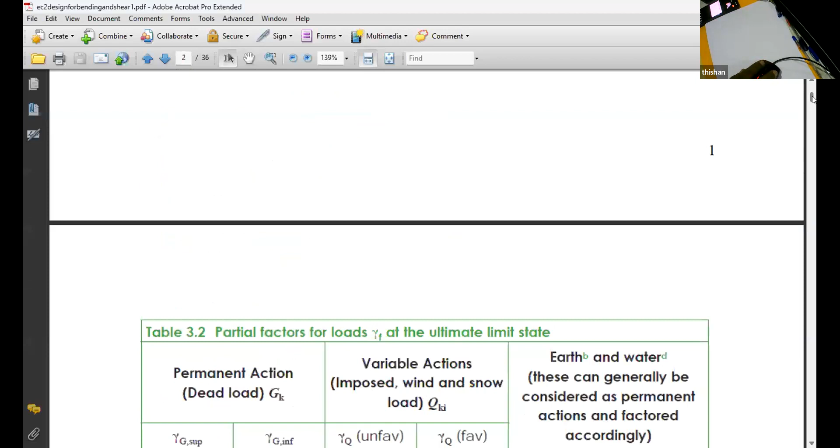Right, good. Okay, first we'll share the screen, see this note. Right. So if you look at... now you can see there are many tables and so on.

So after the Second World War, the world learned that these wars are not going to help anybody. So, Civil Engineering Sectional Committee, lecture number 1, on 29th November 2023. I'm numbering all the pages so that we can share the notes later.

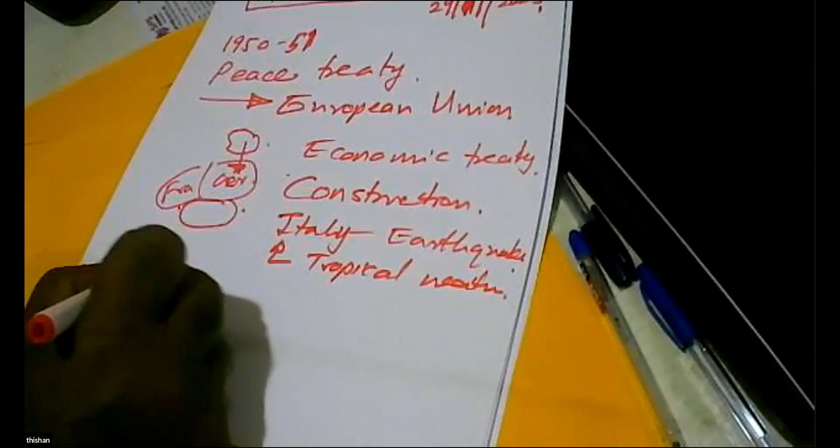But if you look at Europe, you get Italy. What is Italy? A country subjected to earthquakes, and it has more tropical weather. Whereas Germany has no earthquakes, but it's cold weather. So they thought, if you are going to have one standard used by everybody, we can't have one standard across all the different climatic conditions.

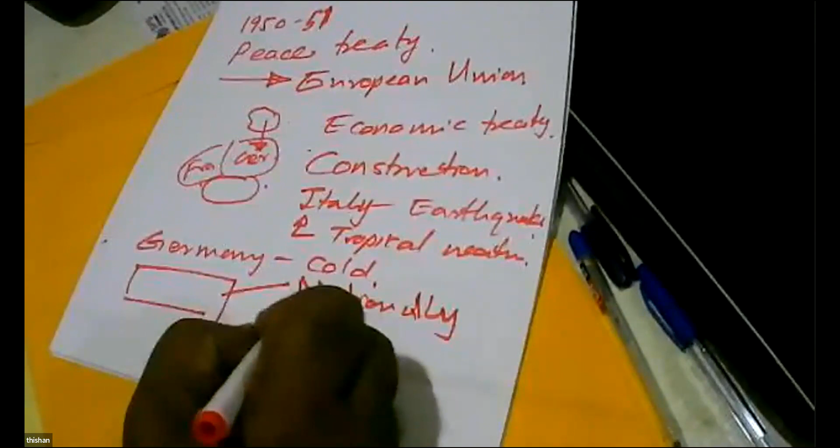So they thought, let's have one code, and we'll allow nationally determined parameters. That means they can differ from the generally proposed parameter in the Eurocode. So with that, we got something called national annexures. And you will find that when a code is developed, there can be many parameters.

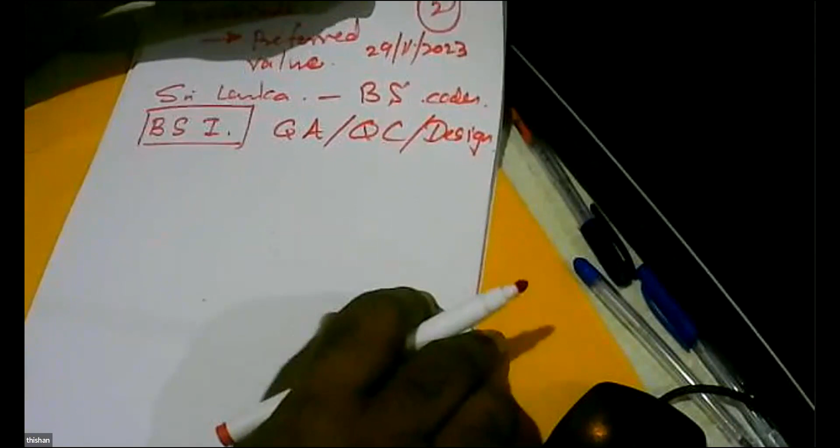But have you ever thought why BS codes are so applicable to Sri Lanka? If you look at England, it has 3 to 4 months of summer. What is the temperature range? The temperature can change between 20 and 30 degrees. In Sri Lanka, throughout the year, the temperature can vary between 20 and 34 degrees. So you can see, if you have a certain standard applicable to England, which is a temperate country, not a cold climatic country, we can actually use those standards pretty well in Sri Lanka as well.

So if you look at Eurocodes, they have 36 codes altogether. So you can see, if you want to be a very good designer, you should know all these 36 codes.

When these Eurocodes came into action after 2010, because all the British code standards ceased operation in 2010, a very good initiative was taken by Sri Lanka Standards Institute, and Engineer Mangala Silva also participated as the representative of IESL. They have already completed a few national annexures. They looked at the British national annexures very carefully and made only minor changes, keeping most of it unchanged because it's actually applicable to Sri Lanka. So if you don't have a national annexure, you don't have to worry. We can simply use the national annexure of England, United Kingdom, because those are actually applicable to our country to a great extent. So we don't have to panic. We can simply change over to Eurocodes without worrying very much, because UK national annexures are already available. So that's how it goes.

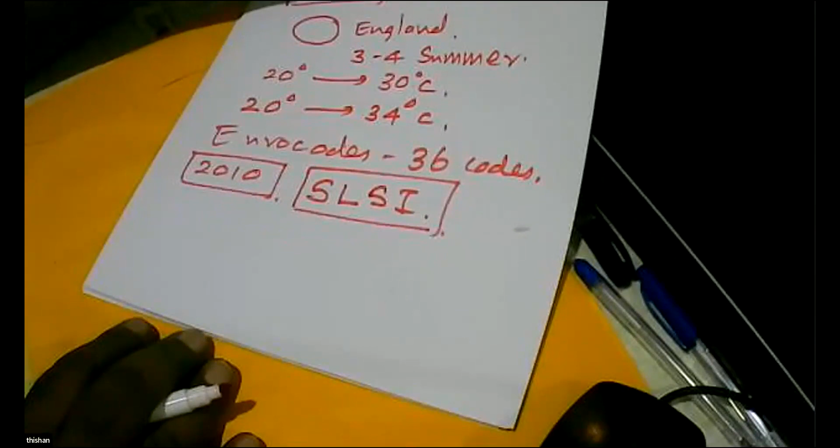So if you look at loading, the approach for loading is one of the key things that we start for a design. To start a design, we must know loading. Not only loading, we must know how to generate critical conditions, critical combinations.

If I take an example from the British Code, a simple example that most of you are very familiar with, Civil Engineer Section Committee, 29th, 11th, 2023.

So, Mangala? Yes, can you hear me sir? Yes, I can hear you. Today we have participation exceeding 200. Is that right? Yes, 211. 211. Yes, good, right.

So basically, if you look at a beam, let's take a simple beam. In the British Code, we say, okay, we must have GK, that is the dead load. Then we say, okay, you can have imposed load, QK.

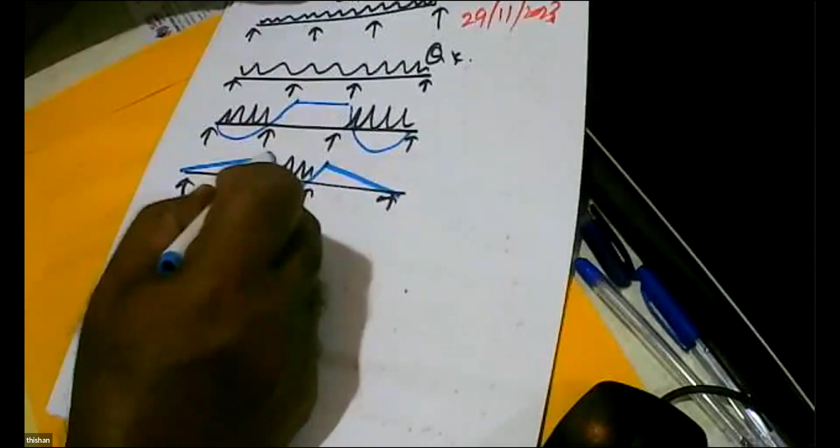We can have QK in different ways - these two have QK, or we can have QK here. What is the effect? We end up with a bending moment diagram that goes like this, or a bending moment diagram that goes like this, or one that does that. And here also we can have a bending moment diagram that does that. So we can have different diagrams.

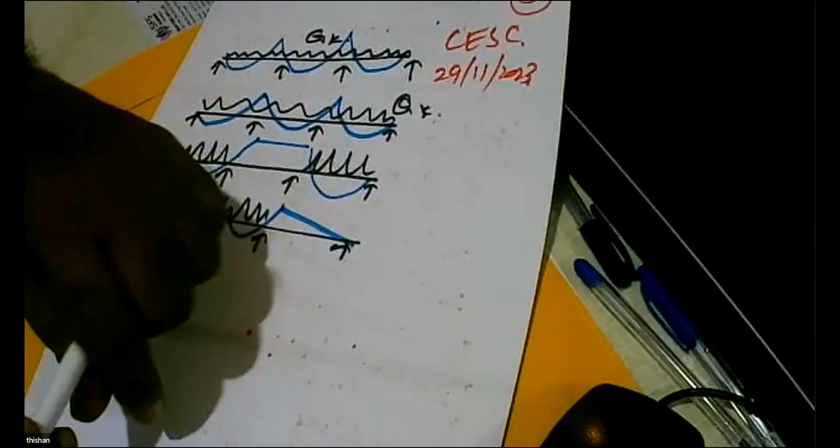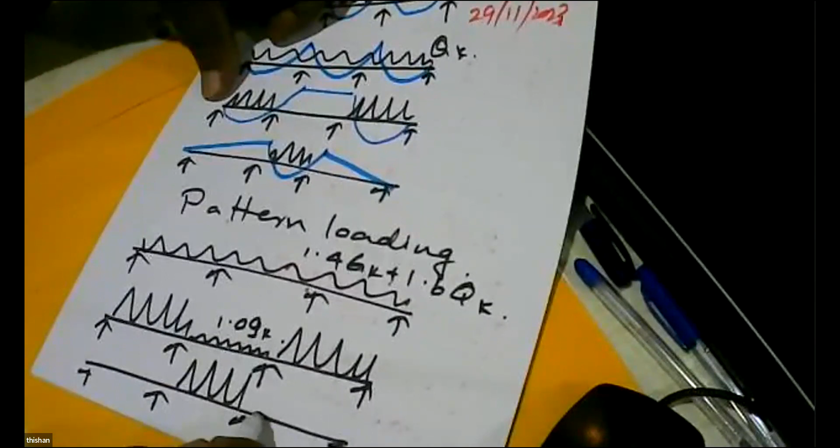So to get the most critical combination on a beam, we say let's go for pattern loading. When you are going for pattern loading, say we have 3 spans. We can have 1.4 GK plus 1.6 QK, or else two other patterns where you have 1.4 GK plus 1.6 QK and 1.0 GK, or this one 1.0 GK, 1.0 GK, and here you get 1.4 GK plus 1.6 QK.

So we can have pattern 1, pattern 2, pattern 3, and if you look at the bending moment diagrams...

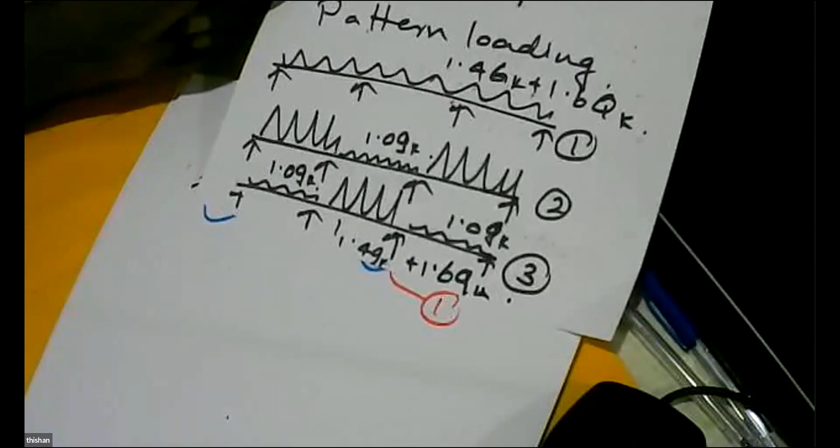So we'll have a beam having a bending moment diagram like this - that's due to pattern 1. Then due to pattern 2, which is this one - pattern 2 is this one - we can have a bending moment diagram that does this and going that way. Or else we can have a third pattern, this pattern 3, can see the pattern 3, we can have something like this.

And, giving an envelope. Once we have the envelope, we say now we have an envelope and we are going to make use of the envelope, not the diagram. We are going to make use of the envelope.

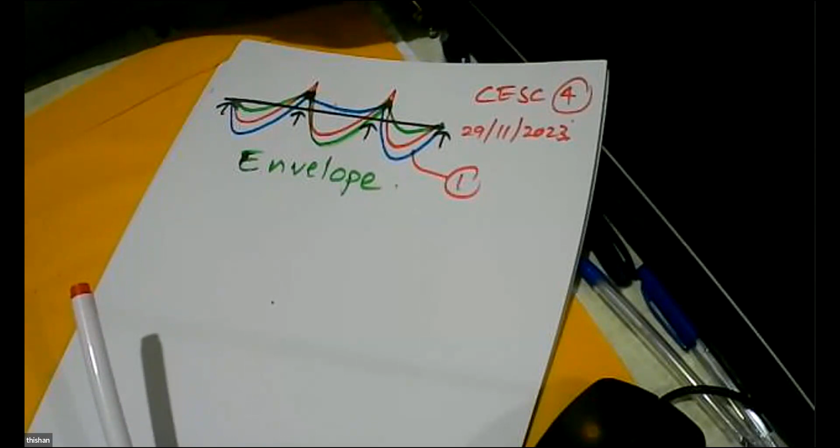Similarly, corresponding to this, for shear also we will end up with an envelope. For shear also we will get an envelope, but for the time being we will concentrate more on the flexure. So now we see, just one moment.

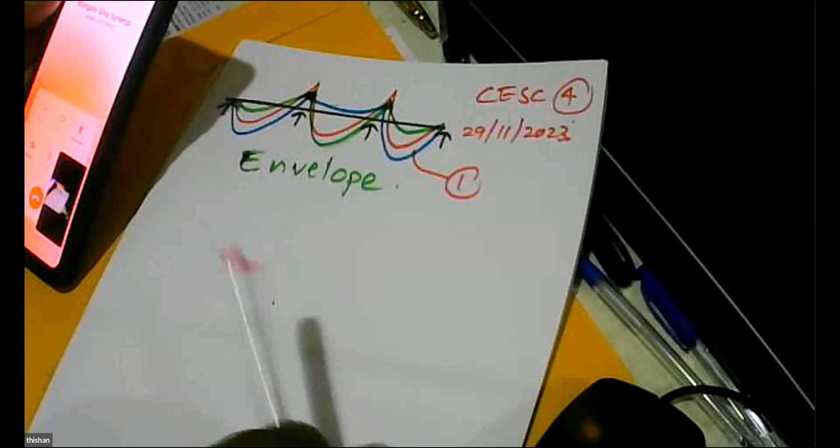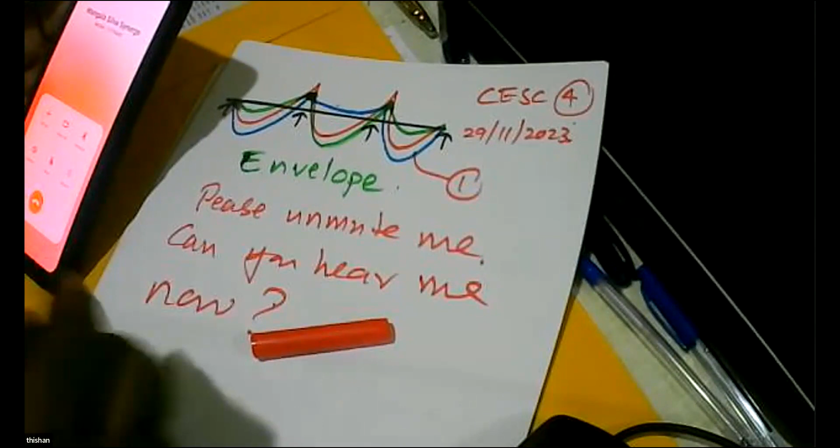Banduka, this is a small request from Professor Jaisinghe to unmute him. Engineer Banduka, yes, can you make Professor unmute for a few minutes? Oh yeah, I will do it. Can't unmute from this end. Can't you unmute from this end? No, can't. Then please tell him. Okay, Professor, Engineer Banduka said it is not possible to unmute you. No sir, we can't hear you still. I think it is muted. And I can't unmute from this end. Okay sir, now can you try sir? Yes, now it's okay. Okay fine. Right, now you can hear me clearly? Yes, we can hear you sir. Now you can hear me? Sir, we can hear you sir.

Yes sir, good. Right, okay, so we have to go for an envelope like this.

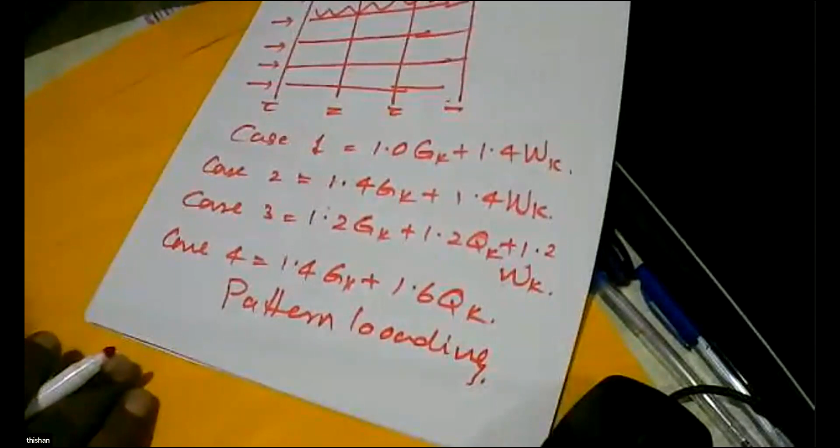So this is what the British code says. Now let's see what the Eurocode says - Eurocode is slightly different in this approach. So this is what the British code says: case 1, case 2, case 3, case 4, and for case 4 it says consider pattern loading as well where applicable. Right, so it's clear.

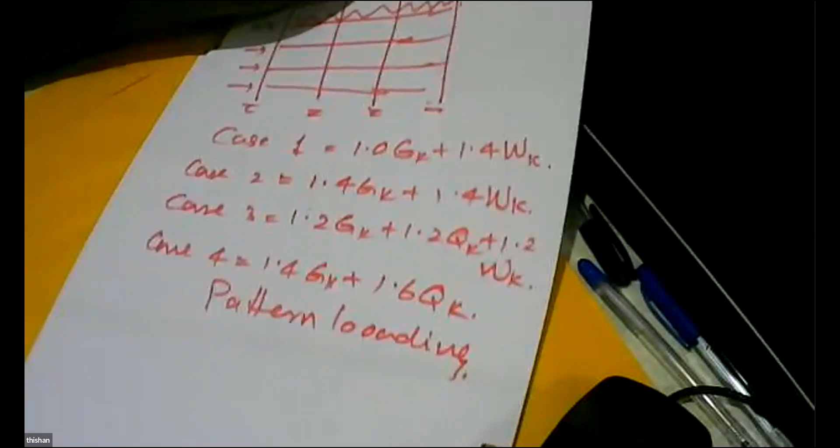But now let's look at Europe. Now I'm looking at Europe. So it talks about the dominant effect and other effects. So let's have a quick look at how it goes by sharing the screen.

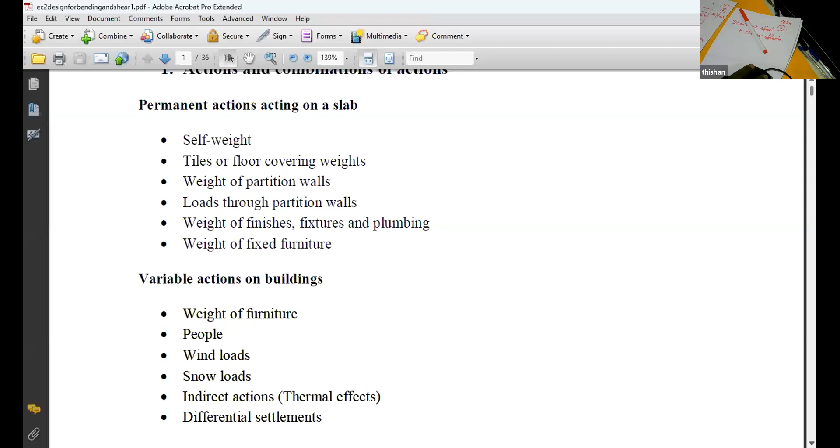If you look at the structure, we can have so many different actions and combinations of actions: due to self-weight, tiles and floor coverings, weight of partitions, loads, weight of fixtures, plumbing, weight of fixed furniture. Those are the vertical actions, the permanent actions. Variable actions include weight of furniture, people, wind loads, snow loads, indirect actions, thermal effects, differential settlement. Those are variable actions.

When you look at loads, what we do is multiply the basic loads by the appropriate partial factor gamma F to get the design loads. When more than one live load or variable action is present, the secondary live load may be reduced by application of the combination factor psi. See table 3.4.

The basic load combination for a typical building becomes: gamma G for the dead loads, gamma Q for the imposed loads, and this is the primary one. For the secondary one, you get another psi naught factor. So what it means is... we have the structure, now we are talking about all types of loading.

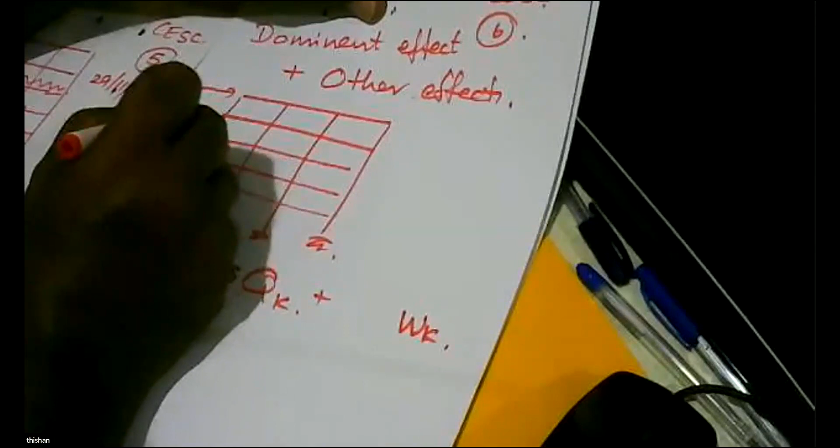What it says is, okay, you can have GK. What is the factor? 1.35, instead of 1.4 you have 1.35. Plus QK dominant, then you can have 1.5. But when these two are dominant, you can have wind load also dominant, so we have WK. For WK, the factor is 1.5, but you have to consider it multiplied by 0.5 times. So the combination will be 1.35 GK plus 1.5 QK plus 0.75 W.

Whereas in British code, we have 1.2 GK plus 1.2 QK plus 1.2 W. Now at the same time, you can say WK can come this way, QK can go that way, then you can have 1.35 GK plus 1.5 WK plus 0.7 times 1.5 QK, so you will end up with 1.35 GK plus 1.5 WK plus 1.05 QK.

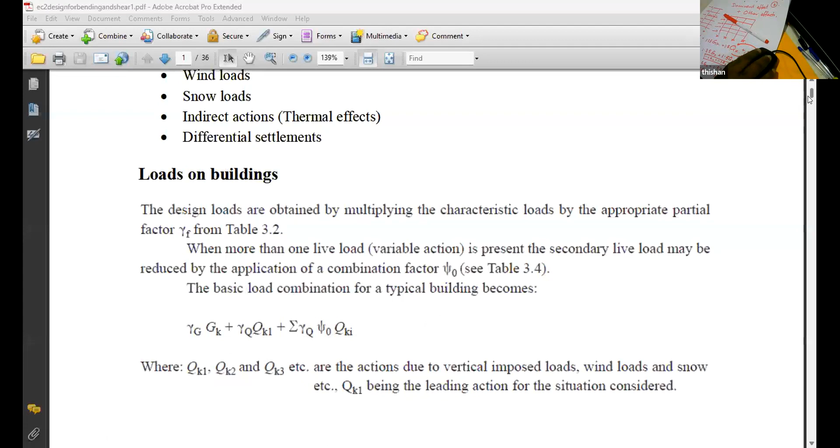Now you can see GK, QK, QK, and QKI. So you can have a number of things combined, but for each one you have a psi naught factor. Let's see what this psi naught factor is. Now you have to become a little familiar with these reduced factors of safety for dead loads and imposed loads, 1.35 and 1.5. Earth and water can generally be considered permanent actions and factored accordingly - earth and water loads should all be multiplied by 1.35 because they are permanent loads, if they are permanent loads.

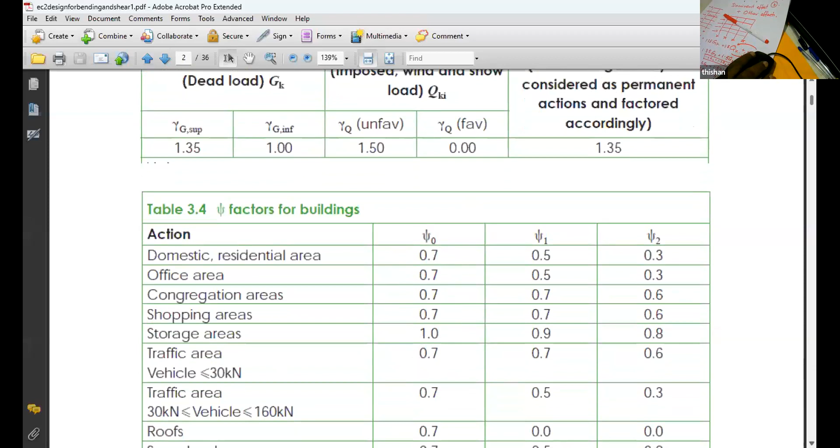Now let's look at this one. We are interested in this psi naught factor. Except for storage areas, generally the psi naught factor is 0.7. But when it comes to snow loads, wind loads, it reduces to 0.5. And when you want to get temperature effects, you have to use 0.6.

Then you look at why you are having some other factors, psi1 and psi2. When you are using Eurocode, at certain places you will find it uses psi1 and psi2 factors as well. Whenever you see psi1 and psi2 factors, you must come back to this table and have a look.

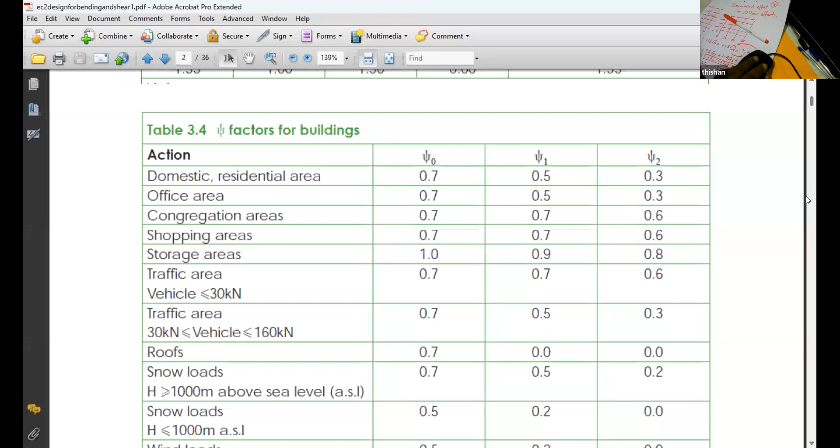Okay, so basically I will send this note. Traffic area vehicles: traffic area 30 kilonewtons, vehicle up to 160 kilonewtons, that means 3 tons to 16 tons for area vehicles, roofs, snow loads at high altitudes, and wind loads.

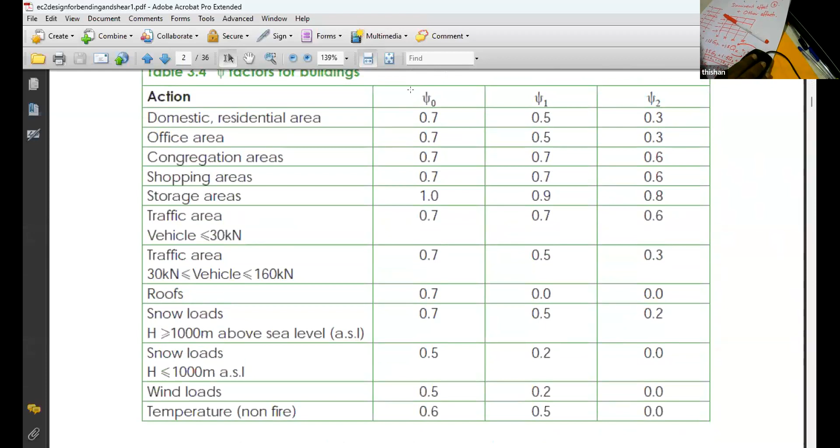There are so many factors, but let's not worry about psi1 and psi2 for the time being. Whenever we come across those in equations, we'll look at what is meant by them. But generally, we should know what is meant by psi naught to use Eurocodes.

It also says unfavorable and favorable factors should be used so as to produce the most onerous condition. Generally, permanent actions from a single load source may be multiplied by the unfavorable or favorable factor. For example, all actions originating from the self-weight of the structure may be considered as coming from one source, and there is no requirement to consider different factors on different sources, except when overall equilibrium is being checked.

So let's have a quick look at what is meant by this particular situation. These are all from EC1.

Let's look at this one. In Eurocode, pattern loading is considered to find the worst case possible when checking structural adequacy. When pattern loads are considered, only the variable load is patterned. For the permanent load, either 1.0 or 1.35 can be used, whichever gives the worst effect. So generally, when checking pattern loading in British code we use 1.0 GK here,

but in Eurocode we use 1.35 times GK. In the British code, we use 1.4 GK when it is fully loaded, and 1.0 GK when only the dead load is available. But in Eurocode, we use 1.35 GK - the minimum load is also 1.35 GK, it doesn't change. That is one of the variations between British code and Eurocode.

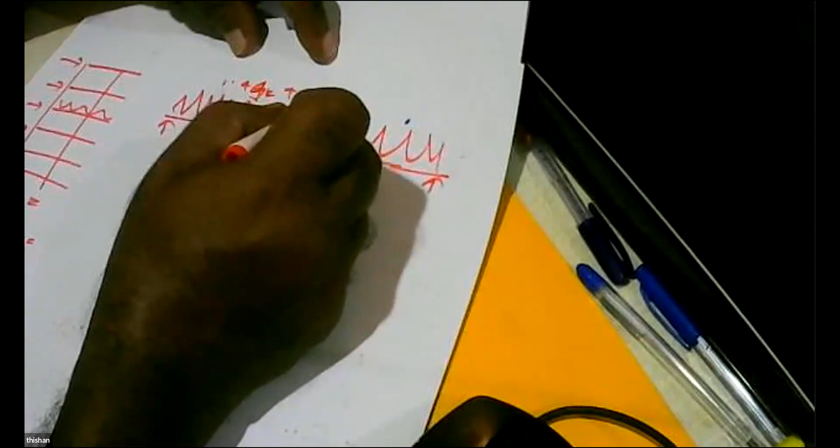So that is 1.4 GK plus 1.6 QK, but here 1.0 GK. In Eurocode, it's the same thing you are doing, but this is 1.35 GK plus 1.5 QK, and this is also 1.35, not 1.0. That's another important change you have to keep in mind when generating pattern loading.

Actually, it's very easy to generate pattern loading using a computer because of this particular condition - because we are using the same parameter for the dead load. It can be either 1.0 GK throughout, but because you are using 1.35 GK plus 1.5 QK, here also you have to use 1.35 GK. So that's how it goes - we use 1.35 GK, but not 1.0 GK as we have done in British codes.

Bandhuka, is that clear? Yes, sir, that is clear. That's clear, so that has to be kept in mind.

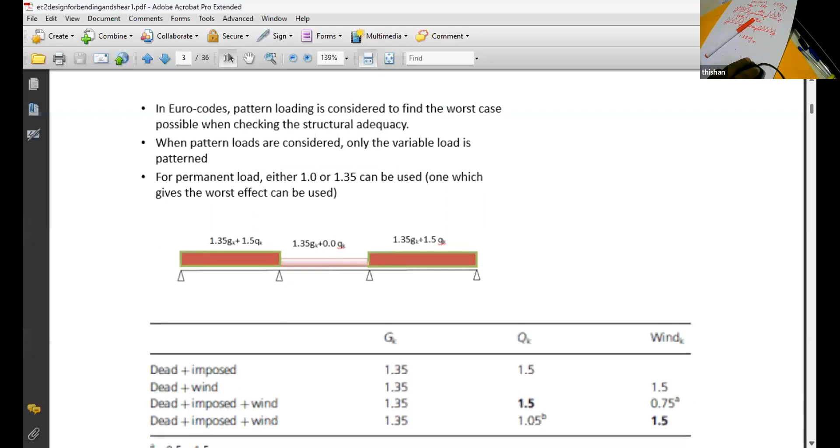the combinations: dead and imposed 1.35, 1.5. Dead and wind 1.35, 1.5. Dead, imposed and wind 1.35, 1.5. Dead and imposed, but wind should be multiplied by 0.5, so 1.5 multiplied by 0.5 is 0.75. For dead, imposed, wind, you have another combination where wind is kept full and imposed is multiplied by 0.7 - 0.7 multiplied by 1.5 is 1.05.

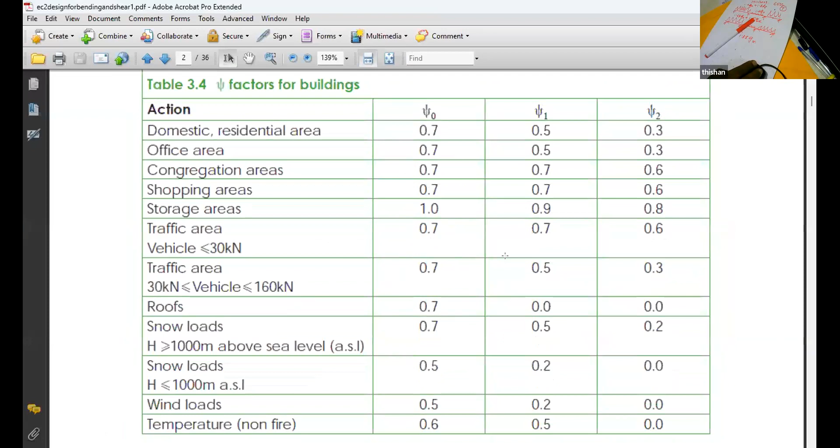Why it happens is, if you look at the previous table of psi naught factors, for wind load it's 0.5, and for domestic conditions and all the other conditions it's 0.7. So imposed loads use 0.7, wind loads use 0.5. So you end up with a table like this, and then you have to look at this condition.

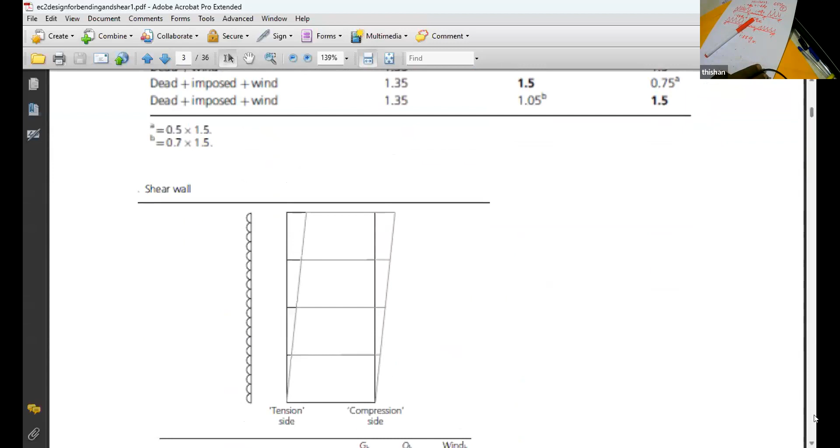Now we are looking at the stability, or the worst case scenario, for a shear wall. On this side you get tension, and to get tension the self-weight has to be minimum. In that situation, on the tension side you get 1.0 GK, and on the wind side, the wind is 1.5. We are looking at lateral stability, whether tension can occur and the shear wall can crack on this side. So to make sure that happens, we maximize the wind and minimize the weight.

So you can have a combination called 1.0 GK plus 1.5 WK. In British code, it used to be 1.0 GK plus 1.4 WK. Here you can see it's 1.5 WK. And then the British code had 1.2 GK plus 1.2 QK plus 1.2 WK. Instead of that, you get 1.35 GK plus 1.05 QK plus 1.5 times WK. In British code, we had only one dead, imposed, wind case, which is 1.2 GK plus 1.2 QK plus 1.2 WK.

Whereas in Eurocode, we have two combinations when dead, imposed, and wind are acting. Here the imposed load is the dominating case, and this is the wind load dominating case. Here you can see wind load is 1.5, and here the imposed load is 1.5. So this one is dominated by the imposed load, and this one is dominated by the wind load.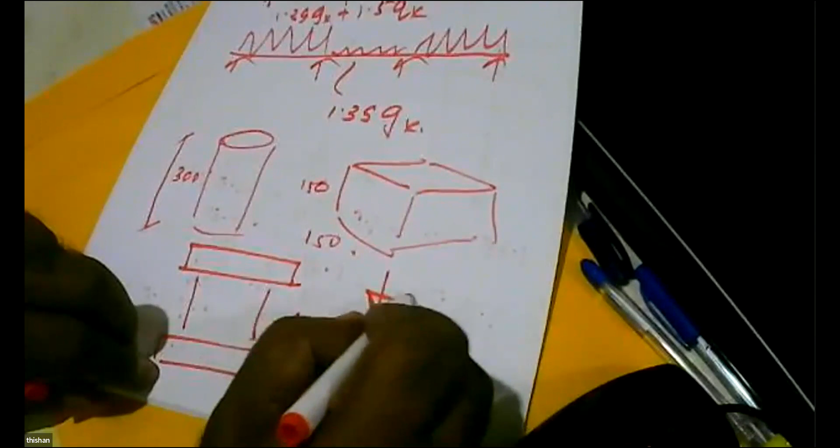Nu is the Poisson's ratio - that's the theory we have learned, I think even at advanced level, as far as I can remember. Anyway, in university you learn it. So what happens? When the cube tries to break, these places are restrained. Because of that, the cube strength is higher than the actual strength. So cylinder strength gives the actual strength, while cube strength gives a higher value. We have to always keep in mind the cylinder strength is not... rather, the actual strength is only 80% of the cube strength. Is that clear? You have to be very clear about that - cylinder strength is the actual strength, whereas cube strength gives a higher value.

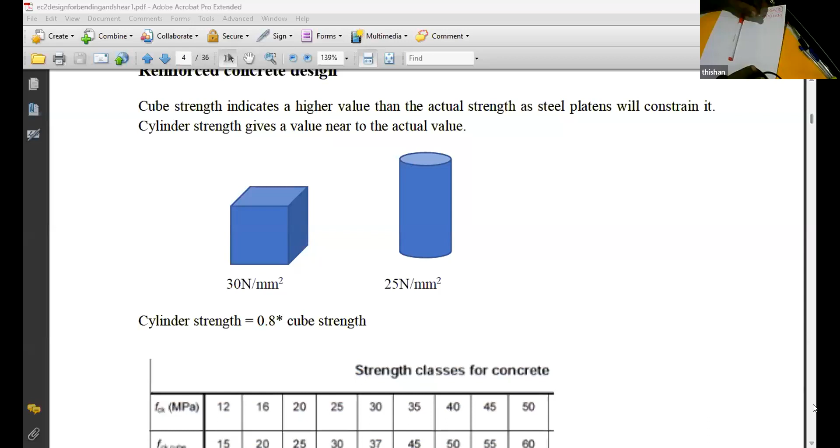Now let's look at this, let's share the note again. So here you can see the strengths. FCK means cylinder strength, FCK cube means cube strength - that's the notation used in Eurocode. So here you can see, when you have 20 megapascal cylinder strength, the cube strength is 25. When the cylinder strength is 25, it's 30 for the cube. So we say we have C25/30 concrete, C30/37 concrete, C35/45 concrete, C40/50 concrete, C45/55 concrete, or C50/60 concrete.

Now you will ask why I have not included the table beyond 60. Cube strength of 60 is a special value in Eurocode, and it actually allows you to go up to 105 cube strength. But the equations that you use are generally valid only up to 60 megapascal. If you are going to use concrete stronger than 60, you have to have different parameters for the design equations. You cannot use the normal design equations if you are using anything beyond 60 megapascal. That's why I have included only up to 60.

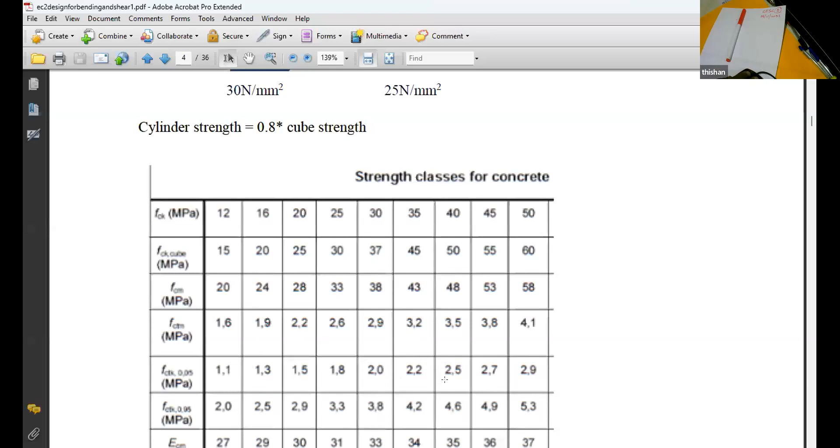There are tensile strength values used in pre-stressed concrete design. But in reinforced concrete, we consider the concrete as cracked, so we don't have to worry about tensile strengths. However, when designing pre-stressed concrete, you need to worry about those values.

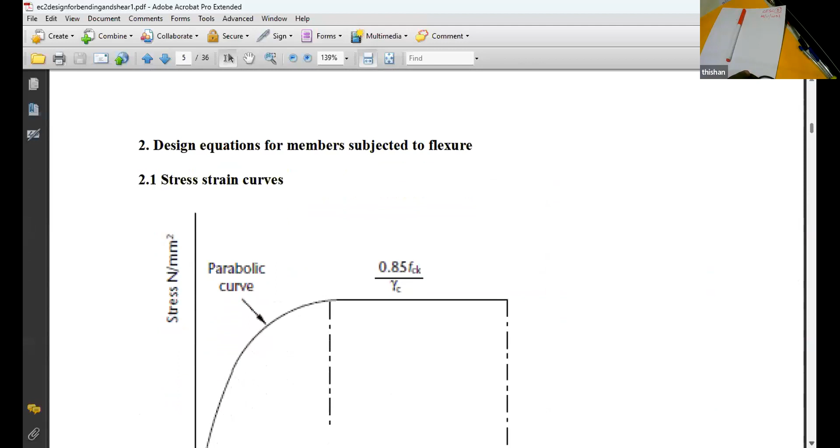If you look at the stress strain curve, the maximum strain allowed is 0.0035. By looking at the stress strain curve, we can get more information. This is the stress strain curve for concrete.

FCK is the cylinder strength, and we have to consider 85% of that. The reason is we test the concrete in compression, then use that value in flexure. So the flexural strength of concrete in compression is considered as 0.85 times the cylinder strength.

It starts to become a plastic material from a strain of 0.002, and it cannot take a strain more than 0.0035. This is a very familiar figure - even in BS code, we consider that concrete cannot take a strain of more than 0.0035. So this is the stress strain curve for concrete.

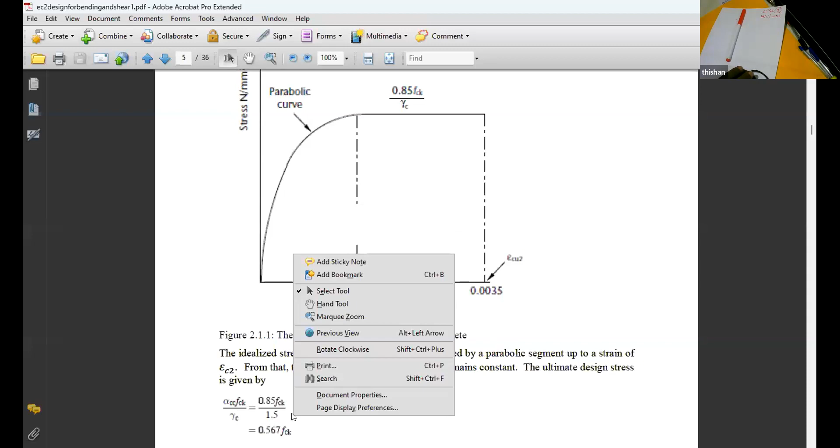It is 1.5 because we are supposed to cure concrete once we place it, but many people do not pay enough attention to curing. So we can't use 0.85 FCK because we might be overestimating the actual strength of concrete in the structure. To allow for that, we use a high factor of safety, not because we are making bad concrete, but because we don't cure adequately.

We do not cure it adequately. Because we are not curing it adequately, there can be variations in the strength. It's not only because we use different ingredients to make concrete, but curing also comes into play. So curing is very important, and we must cure concrete properly. This also allows for the long-term effect, the difference between cylinder crushing strength of concrete and bending strength. The value 1.5 is used as the partial safety factor for concrete strength, gamma C.

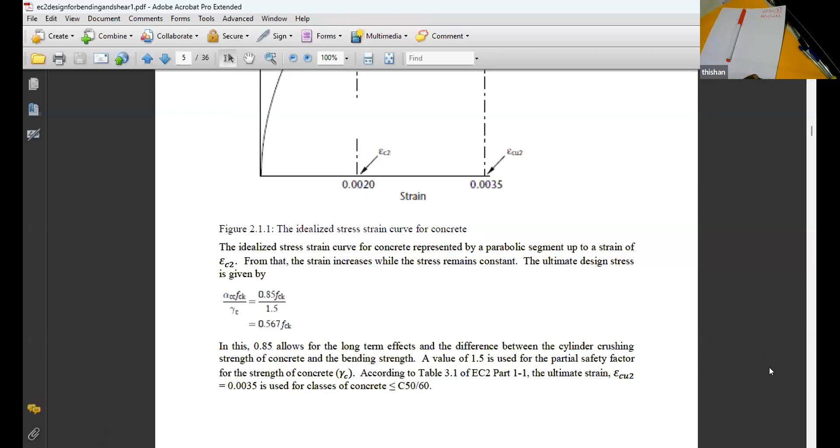Up to C50-60 concrete, we can use 0.0035, but beyond that it will be less. Now let's look at steel.

Eurocode allows steels from 400 megapascal to 600 megapascal tensile yield stress. Eurocode specifically says any steel used should be 400 to 600. So that means we can make use of old tor steel, which had a strength of 460.

But these days we use QST bars - quench and self-tempered bars. What we do is get the steel bar manufactured red hot, then pour water onto it, making a very hard surface. Then we allow it to cool down gradually. When cooling down gradually, the toughness might reduce to a certain extent, but it remains very hard on the surface while the interior remains very soft. So when you bend the bar, the chances of it breaking are very remote.

Also, you can get a higher strength. By adjusting this heating and cooling process, you can get 550 steel or even 600 steel. This might be a good idea for Sri Lanka because steel is very expensive there, so it might be good to go for 600 strength. But at the moment, we only have 500 strength.

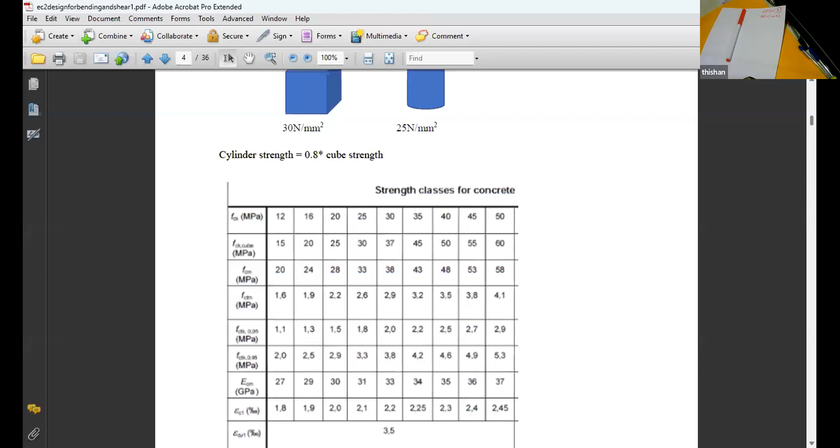That's why in all the tall buildings that are coming up, like the 1 kilometer tall Kingdom Tower in Saudi Arabia, Burj Khalifa, all have used concrete, because concrete is a wonderful material to control lateral deformation, since as the strength increases, the elastic modulus increases. Whereas in steel, even when you consider pre-stressing steel, which is high strength steel, the elastic modulus is 200. So those are the important things you can learn about steel and concrete.

And then comes how to make concrete durable. If you look at the history, the Roman emperors who knew about concrete over 2000 years ago said, we have invented a material that is going to last forever, because they had only concrete, they did not have steel. But today, when you have only concrete, the best shape is arch shape.

But today we don't use the arch shape a lot, we use beams, columns, slabs a lot. These members are subjected to flexure, whereas arch shape is generally subjected to compression. Because these shapes are subjected to flexure or bending, we need reinforcement. The moment you insert reinforcement, concrete does not become a material that is going to last forever. Why? So that's what we are going to learn now.

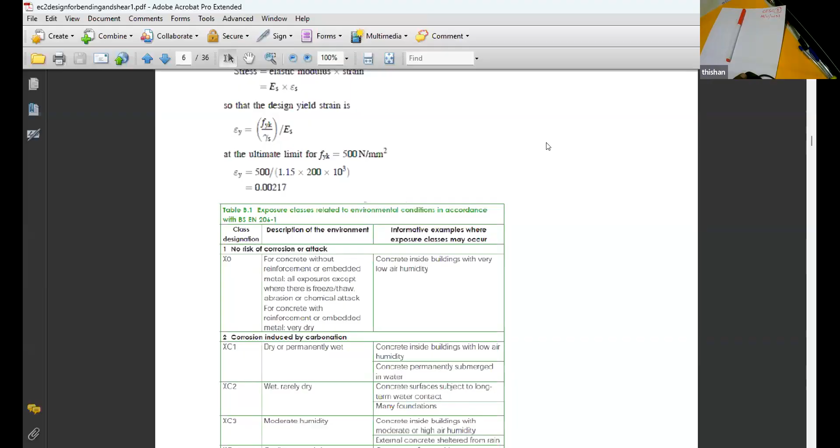I'm going to stop sharing. Just give me 1 minute before I explain this. So now I'm going to explain why durability is so important. And what is the time now? Time is 8 o'clock, so I have enough time to explain this durability aspect. Just give me a little.

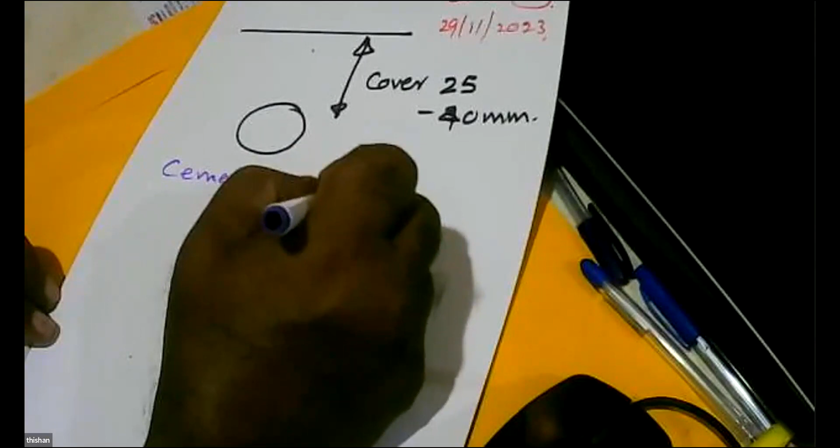Cement is some material that we only add water plus to give us a gel. But the gel is very strong. So what do you get in cement?

Tricalcium silicate. What is the importance? It's active only for a short period, 1 to 14 days. We get dicalcium silicate, it is a very slow reaction. The reaction actually starts after about 2 weeks, but it can continue.

Then we get tricalcium aluminates. Very rapid reaction, from 1 hour to 24 hours. But the problem is we can't have too much tricalcium aluminate, because it can lead to destruction of concrete after a while. So this has to be less than 10%. This can be anything, but generally it's about 65 to 70%. And in the modern concretes, this is only 5 to 10%.

Modern cement. And then you can get tetracalcium aluminoferrite, and that is an impurity that you cannot prevent when you manufacture cement.

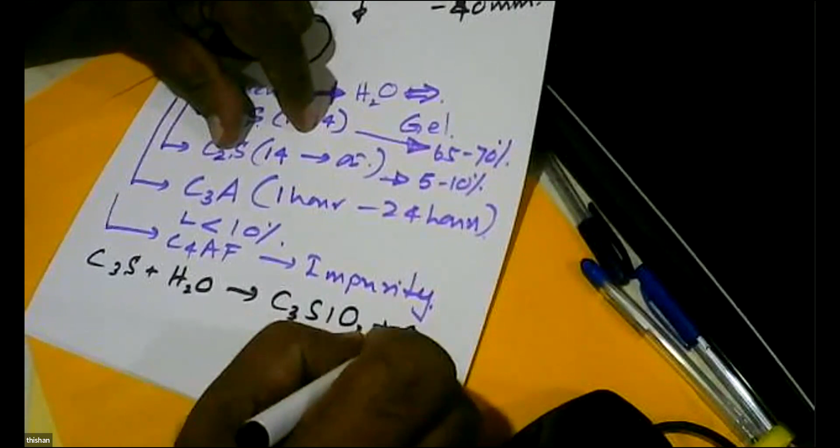So what is the reaction? Tricalcium silicate reacts, and dicalcium silicate also gives the same reaction but at a very low rate. You get tricalcium silicate gel plus calcium hydroxide. This calcium hydroxide is a very important ingredient.

When we use concrete, what is the minimum water cement ratio needed? 0.2. What are we using? We use 0.5. So what happens to all this extra water? It evaporates. Then what do you get? Porous concrete. So then what happens when you continue to cure?

We continue to generate calcium hydroxide, and all that calcium hydroxide starts filling up these voids. So it's very important that we cure concrete, because we are going to fill up all these extra voids with calcium hydroxide. That's why when water flows on concrete, you get some whitish substance coming out — that is calcium hydroxide in water. So we create calcium hydroxide, and those fill up those tiny pores.

And calcium hydroxide, what is the pH? In well cured concrete, the pH can be close to 12 to 13. If you cure it well, it stays high; if you don't, it can be less. So in ferrous metal, as we all know, once it is exposed to the atmosphere, it will form a ferrous oxide layer.

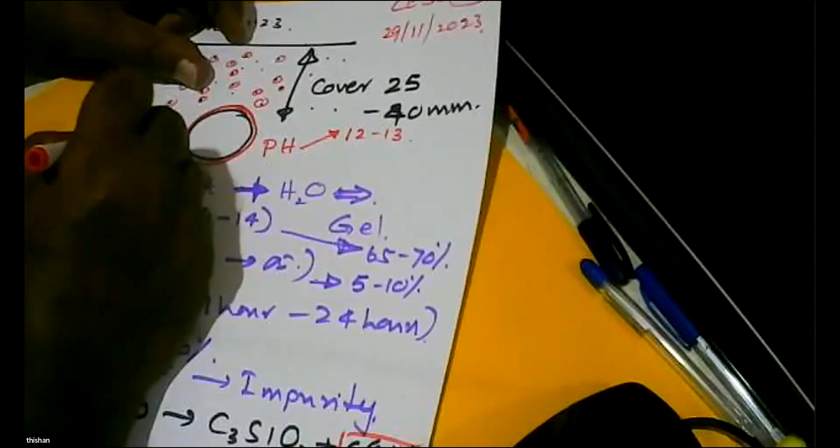What can you say about the stability of this layer? It's not stable at all. That's why, unless we paint steel, unless we apply a paint coat, what happens? It undergoes corrosion.

So when you have a reinforcing bar outside, it also undergoes corrosion. But we put it inside the concrete. What happens? The moment you put it inside the concrete, it stops corroding. Why? When pH is 12 to 13, this ferrous oxide layer becomes very stable.

Like the aluminium oxide layer — you've seen these buses, Tata and Ashok Leyland, having aluminium bodies. But aluminium is a much more reactive metal than ferrous. So why can we have a bus body or a cooking saucepan to boil water? Because aluminium oxide is very stable. Inside that, you get aluminium, which is not stable at all, but the moment it is exposed, it forms the aluminium oxide layer.

Similarly, ferrous, the moment it is exposed to the atmosphere, forms a ferrous oxide layer. If oxygen and water are available, it will continue to corrode, forming more oxide. But the moment you insert the reinforcement into the concrete, because concrete is highly alkaline, this ferrous oxide layer becomes very, very stable.

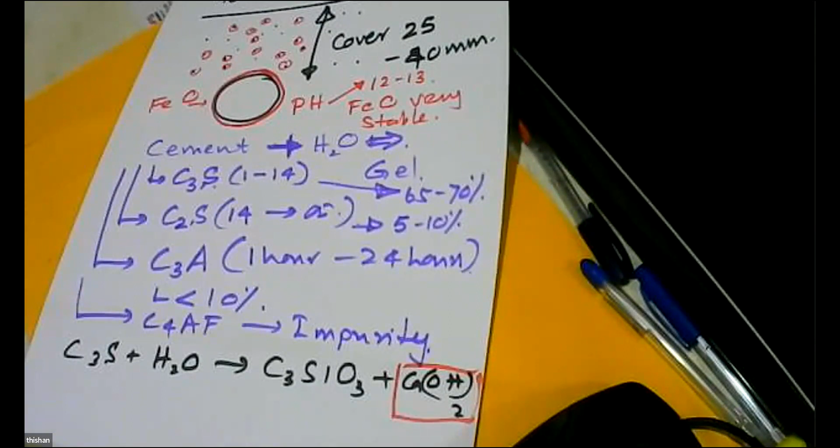But what happens with time? We have carbon dioxide in the atmosphere. This carbon dioxide starts reacting, gradually forming calcium carbonate as a layer, and that is called carbonated concrete.

So what is the problem? Carbonated concrete pH can be around 9 to 10, which means the oxide layer is no longer stable. However, it still takes plenty of time. In a well-cured concrete, for about 25 to 35 years, you might get only 10 millimeters of carbonation. But if you don't cure it well, even in 10 years, you might find the carbonation reaching 10 millimeters.

So which means, what is the minimum cover that we need? We need a minimum cover of 20 to 25 millimeters if you are expecting a reasonable duration without trouble in a concrete structure. That doesn't mean that the moment carbonation reaches that depth, the structure will corrode and collapse. No, it's not.

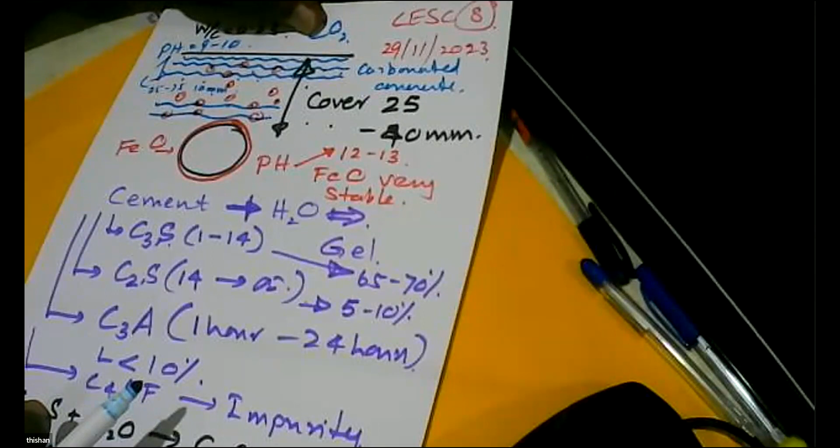If you are protecting the structure, oxygen content is low and oxygen cannot come into contact with the reinforcement, and water is not available — it's all in dry condition — even a carbonated structure can last many years. But you're asking for trouble, you're asking for trouble.

When the carbonation has reached the steel, you have to take a lot of precautions when maintaining the structure. Before that, even if you don't do anything, the concrete will still protect the steel — no corrosion, no corrosion. So that's what you have to keep in mind.

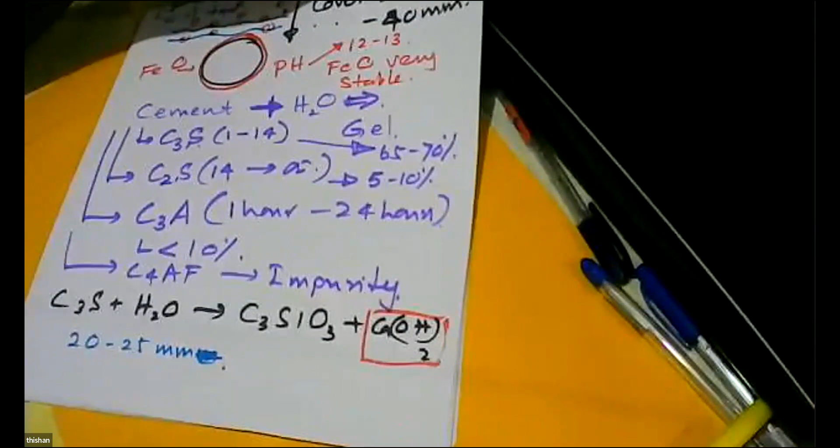So what is the lesson we can learn from this? Although it's on one page, it's a very important lesson.

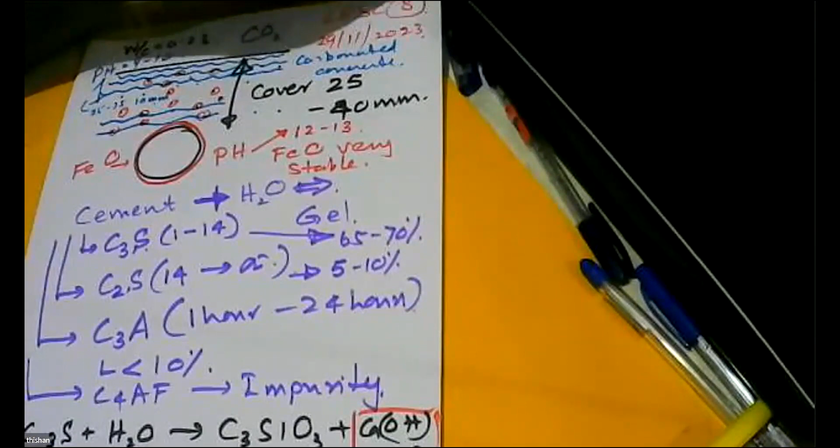It has all the information you need to explain why reinforced concrete should be properly cured. Properly cured — it has all the information you need to know why reinforced concrete should be properly cured.

Manduka, any question you'd like to ask? Anything? There's one question, but it is not directly related to this, sir.

Wanted to ask, what are the recent advances in lightweight but high performance concrete? That one I will come to a little later. Okay, because that's the next thing I'm going to talk about — not lightweight, but normal weight, high performance. Lightweight high performance is something different, because lightweight concrete can be made only by using lightweight aggregates.

Either you use lightweight aggregate and get a lesser density like 18, or use normal aggregate and get a density of 25. But high performance concrete is something different. Let me explain that.

If you are using lightweight aggregate, you will get lightweight concrete. But you can't get lightweight concrete by using cement. You get lightweight concrete by going for very high strength aggregates which are very low in density. Then you will find the overall density of concrete is reduced.

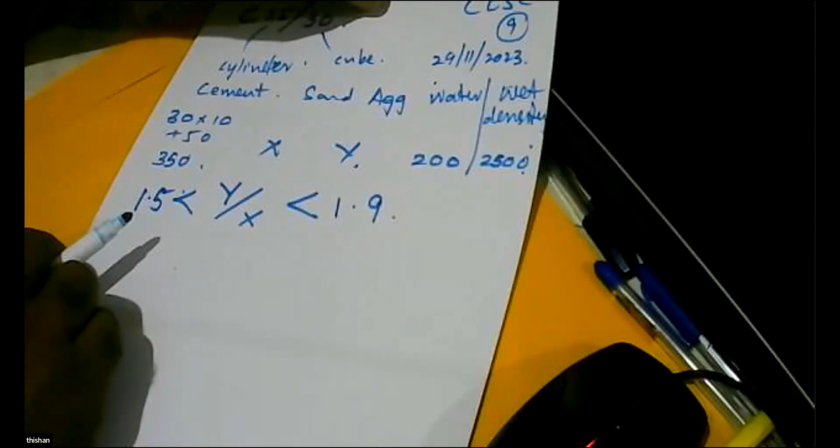Y to X ratio is generally between 1.5 and 1.9. Why do we need this lower limit? If you don't have a lower limit, you will find there's a lot of sand in the concrete but no aggregates. Why do we need this upper limit? Here you will find a lot of aggregates and no sand, no mortar. So this has to vary between these limits.

We'll assume we are using this value. So the mix is 350 cement, 200 water, 2500 wet density. So 2500 minus 200 minus 350 equals 1950.

So we can say X plus 1.5 times X is equal to 1950. This is X, Y over X is 1.5, so Y is 1.5X. X is 1950 divided by 2.5.

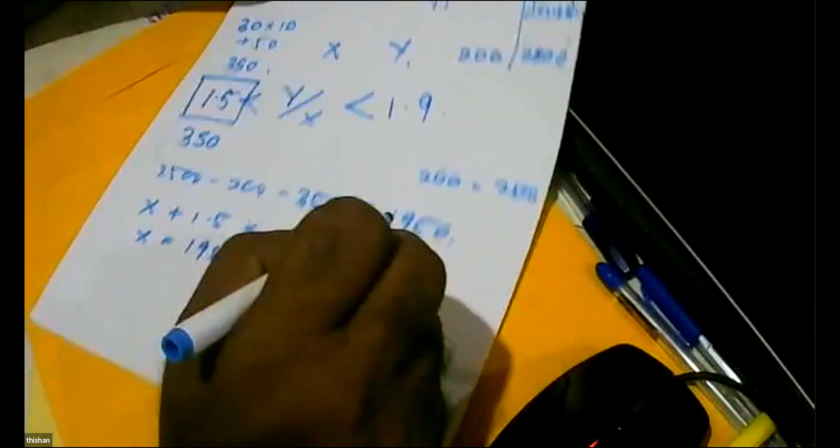What is the value, Bandhuka? 1950 divided by 2.5. Can you tell me the value please? Do you have a calculator? 780. Yeah, 780. So we get 780 multiplied by 1.5.

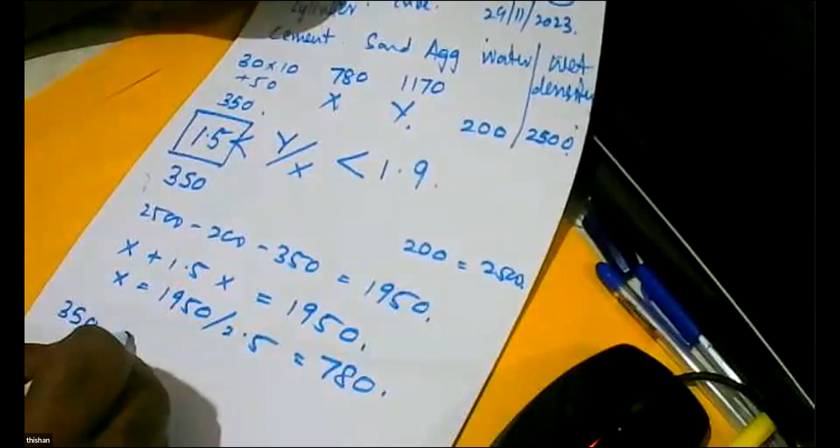What is the value? 1170. Right, so you get 350 cement, 780 sand, 1170 aggregate, 200 water, giving a wet density of 2500.

So this is a mix without admixture. But we know these days we like to use admixture. Why? Because admixture can help us to reduce water content. How does an admixture work? Admixtures can disperse the cement particles well, and when the cement particles are dispersed, they can act as a lubricant. So with a lesser amount of water, you can get a higher workability.

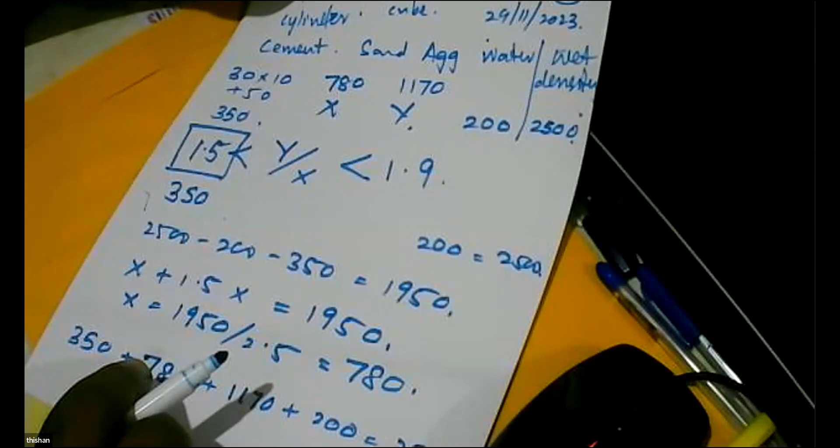So let's say now we have decided to go with an admixture, using 160 for that. At the moment you are using admixture, we know in concrete, who is our friend? Cement. Who is our enemy? Water. Now you reduce the enemy, then you can reduce the friend as well. Reduce it to 320. So now we have knocked off 30 here, 40 here, 70 kilograms.

So that 70 should come from here. So we might get 805 and whatever the corresponding value here. What is the corresponding value? 2500 minus 320 minus 160 comes to 2020 minus 805.

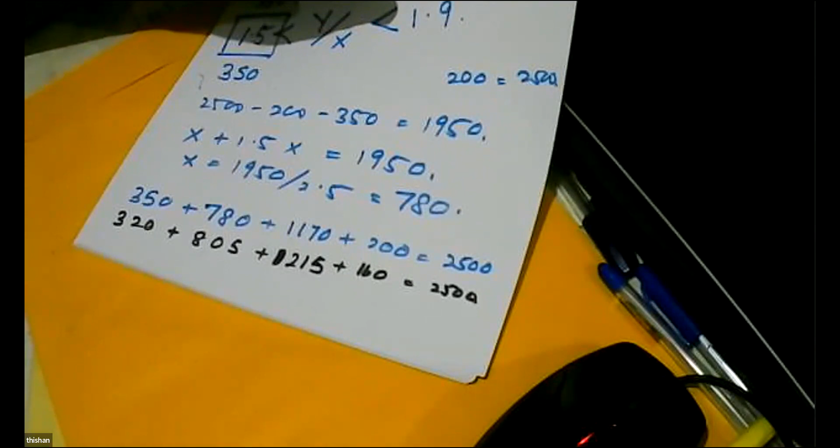So you get 1215, is that right? 2500 minus 320 minus 160 minus 805 is equal to 1215. Is that right? Yeah, 1215. So this is a new mix.

Now let's say you have decided, okay, now I'm a little concerned about thermal effects. Like when you add water to cement, what happens? You get a reaction where the temperature rises.

When the temperature is more than 70 degrees, we can get this tricalcium aluminate reaction occurring in the reverse direction, and it will lead to tricalcium aluminate returning to its original form inside concrete. And after a while, this can start expanding again, causing cracks in concrete.

So I can show a figure. Just one moment, until I find the file. I'm going to share the screen again.

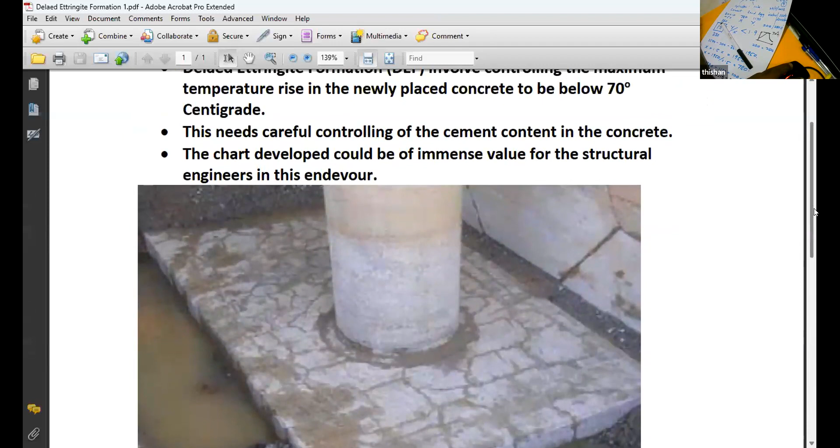According to my knowledge, this was happening in Sri Lanka. This is a photograph taken in Sri Lanka, if my memory is correct. This is Southern Highway, Southern Highway pile caps, a pile cap in Southern Highway bridges from Kottawa to Matara. This happened in Sri Lanka. Okay, not everything.

So the important thing is you must control the temperature below that limit. Delayed ettringite formation involves controlling the maximum temperature rise of newly placed concrete to be below 70 degrees. This needs careful controlling of the cement content in concrete. The charts developed could be of immense value for structural engineers in this endeavor.

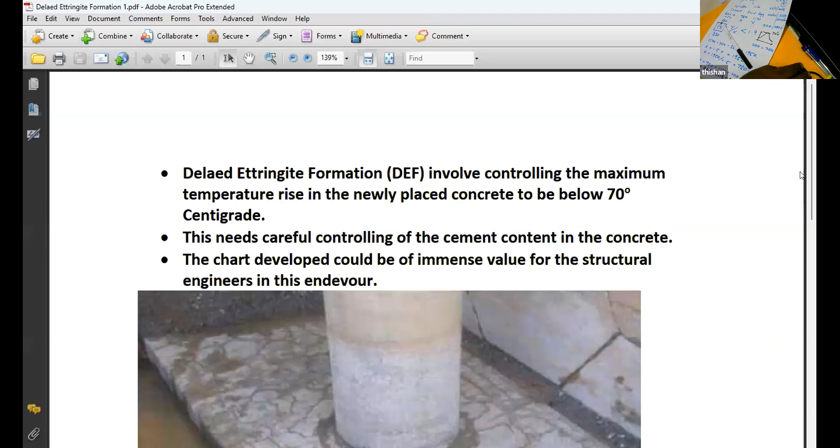So we have prepared some charts which actually tell the full story. I will come to the chart in a little moment. But before that, I will now explain how to deal with this delayed ettringite formation.

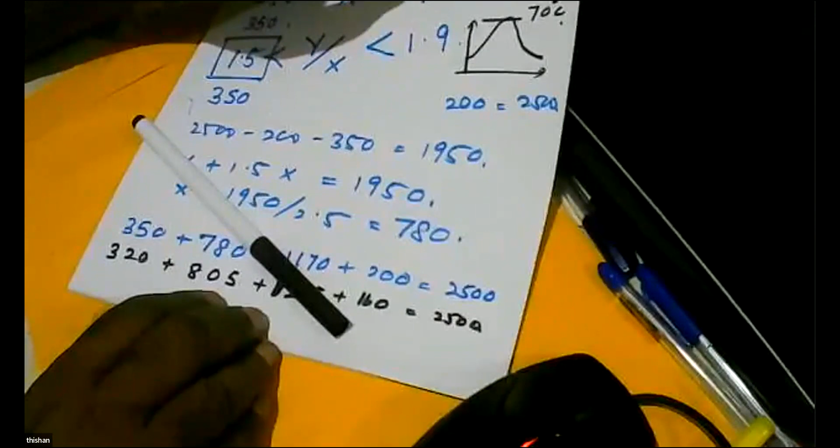What is the rule? Higher the amount of concrete, higher the amount of cement, higher the tricalcium aluminate content, higher the tricalcium silicate content. So tricalcium aluminate will give the initial strength, like our ability to remove the formwork within 24 hours is given by tricalcium aluminate, giving a strength of about 10% of the target strength.

Now after 24 hours, what happens? Tricalcium silicate becomes super active and acts very fast, generating a lot of heat. So if you want to prevent delayed ettringite formation by keeping the temperature below 70 degrees, what do you have to do?

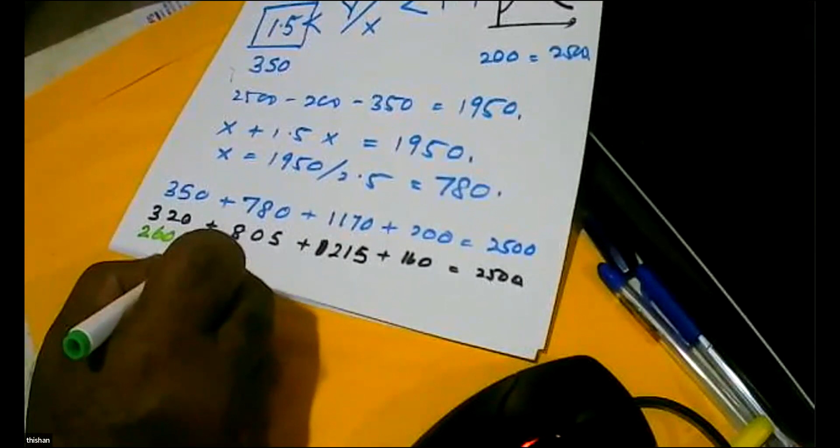Minimize the cement. How do you minimize the cement? Let's say we use 260 kilograms of cement and 60 kilograms of fly ash. The moment you use 60 kilograms of fly ash, you'll find the density on this side will also come down. Still, we can keep the water at 160.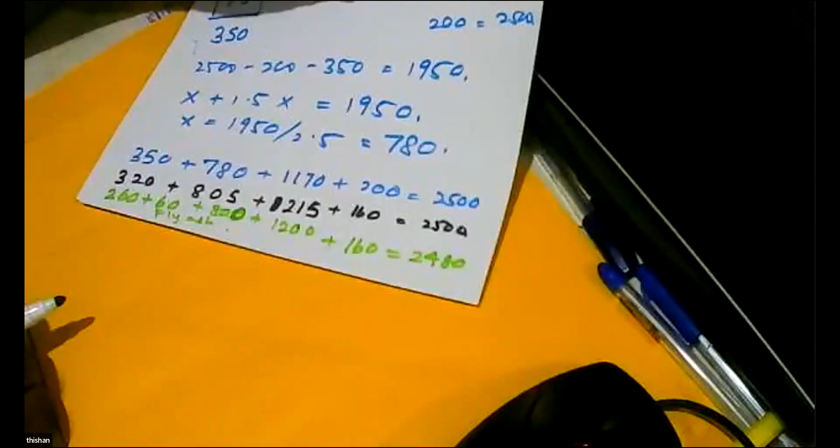Now we are not changing any of these parameters. 800, 1200. Why? The weight density has reduced by about 20 kilograms per meter cube because fly ash has a lower density than cement. So now we use 60 kilograms of fly ash of lower density. Now the final weight density has also reduced slightly.

But this is not lightweight concrete, this is normal weight concrete. But how much cement is available? 260. And fly ash reaction is not going to start immediately. How does the fly ash reaction start? Fly ash is a pozzolanic material, which means fly ash is going to react with the calcium hydroxide that we generate, plus fly ash will give calcium silicate gel.

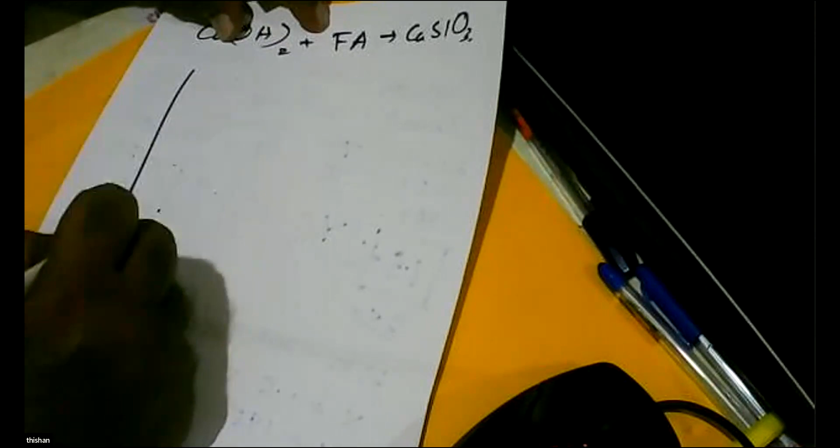So gel is given. What happens? Concrete will now go in a different path. If you look at the textbook, what does it say? If you are expecting the final 28 days strength as 1, in 7 days we get 2/3 of strength. These are what the textbooks say.

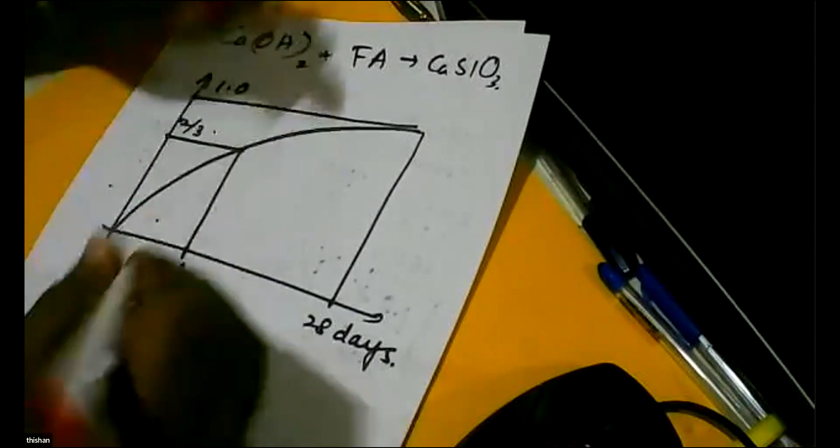Now what happens today? The textbook curve was done when tricalcium silicate was limited to 50%, dicalcium silicate was 25%. Today, you get about 65 to 70%, 60 to 65%, only 5 to 10%. What happens? Now the reaction goes in a different curve. It reaches 28 days strength very fast by 7 days, but it does not increase the strength very much after that. It goes in a curve like this.

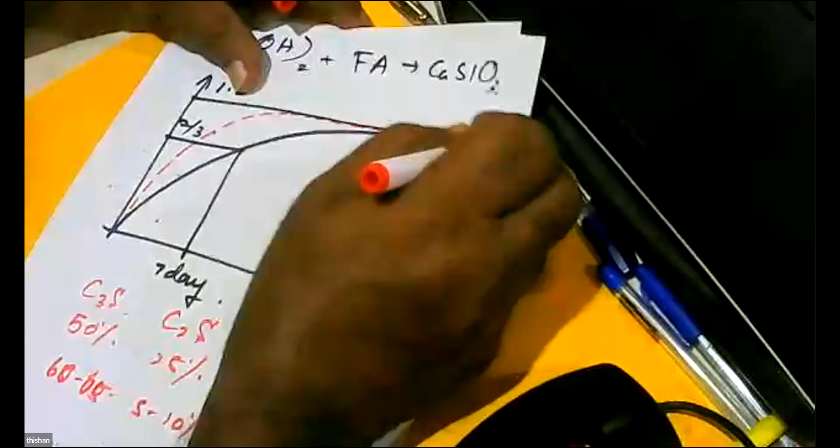So that's why we say, if you can cure concrete for 7 days these days, it is sufficient. You don't have to cure it for 1 month.

But the moment you add fly ash, what happens? Because we have less cement now, it will go more in a curve like this. But the advantage here is it will continue to gain strength, because this reaction is going to happen beyond 28 days.

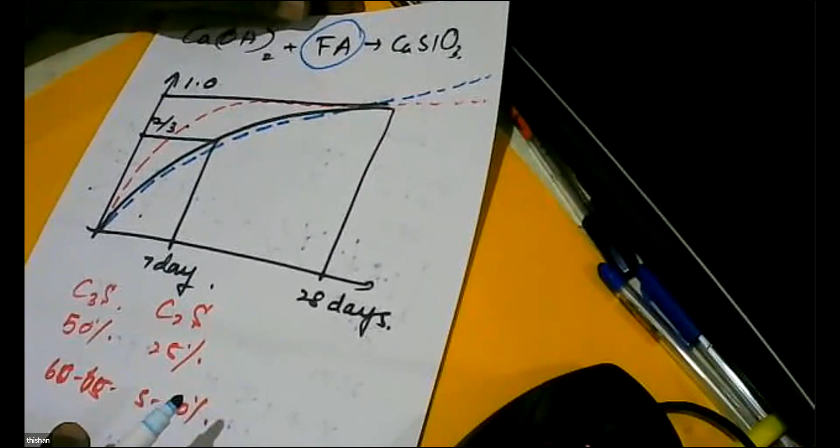So what is better? Using fly ash or without using fly ash? Using fly ash is good, and the percentage can be 10% to 25%. So today we can buy cements blended with fly ash from leading manufacturers, and most cements have some amount of fly ash.

On the other hand, we can buy Portland cement and mix it at the site. If you look at Portland cement, we pay 40 rupees per kilogram, and fly ash you will spend only about 10 to 15 rupees per kilogram. So you can reduce the cost of concrete by adding fly ash at site, where you pay the same amount for Portland cement. You don't buy blended cements, you buy Portland cement and mix fly ash, then you can reduce the cost of concrete.

On the other hand, if you are not concerned about the cost but concerned about the ease of making concrete, you will buy a blended cement with 15% fly ash. Then automatically you are adding fly ash to the concrete and reducing the rate of reaction. And with the lesser rate of reaction, you have a lesser chance of forming delayed ettringite formation.

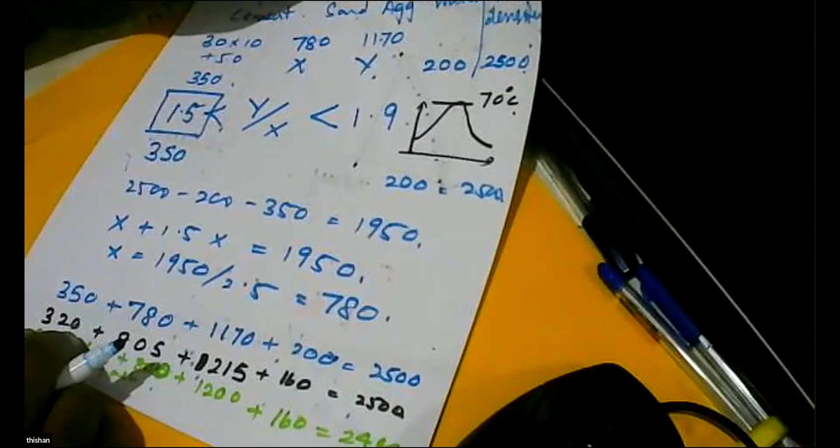Is that clear, Bandhuga? Mangala, is that clear? Yes, sir. Yes, it's very clear.

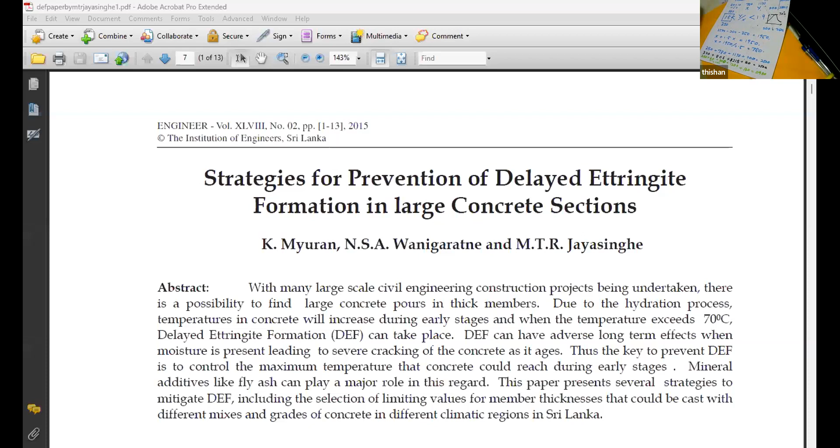We looked into all these problems in Sri Lanka, and we thought, okay, let's give a tool to the design engineers when they are doing the design. So the tool is this. You can read this paper, you can download it by typing MTR Jayasinghe DEF under Google search. You can directly download the paper, and anyway, I will send a copy to Engineer Bandhuka.

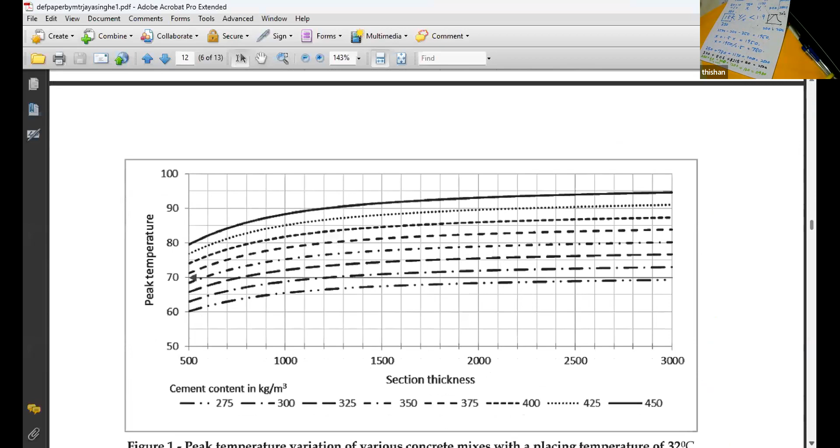Let's look at this chart. What it says is, if you are using 275 kilograms of cement, whatever the thickness of section, the temperature will remain less than 70 degrees. This is the peak temperature, and this side is the section thickness. We are using no fly ash, and the placing temperature is 32. So you can see, whatever the thickness, even up to 3 meters, the temperature remains less than 70 degrees when you use 275 cement.

But the moment you go up to 300 cement, what happens? Temperature exceeds 70. So anything beyond 1.2 to 1.5 meters is in danger of cracking, forming DEF. So how can we prevent this situation?

What we do is, we use 275 cement, but we like to have about 350. So what are we going to do with the remaining cement? Instead of using cement, we use fly ash. So we need a cementitious material of 350, but only 275 of that is cement, and fly ash is 75. And what can you ensure? You can ensure that concrete will never exceed 70 degrees.

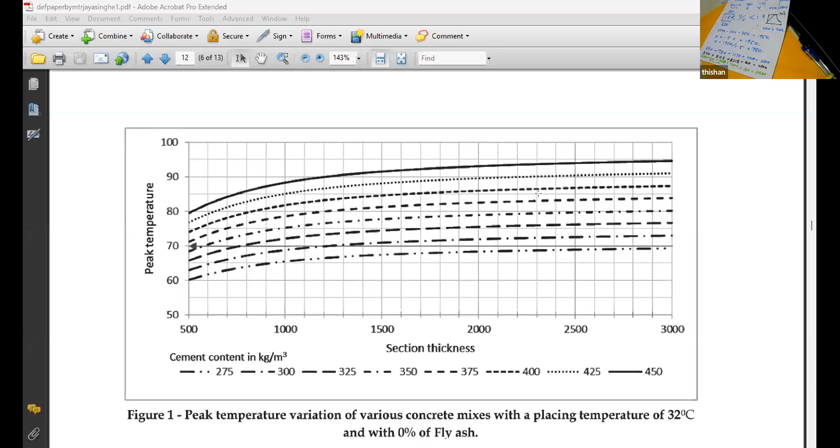Any other question, Banduka? I think that's all. So we'll wind up today, and we'll continue from next week onwards. On the 6th I can take the lecture.

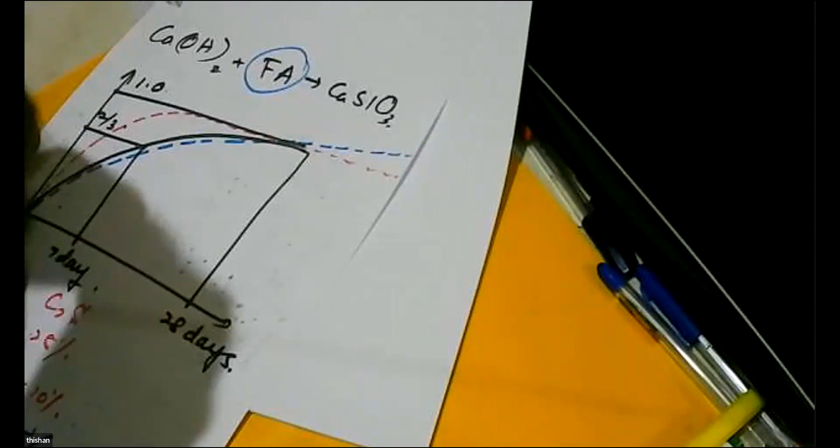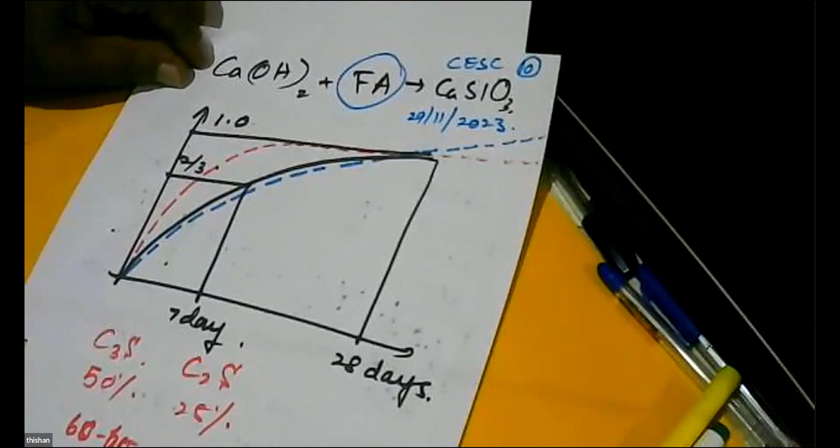Actually, we are grateful to Professor Thishan Jayasinghe, because when he was the chairman in Civil Engineering Sectional Committee 2 years back, he himself started this lecture series starting from tall buildings, and then continued the lecture series of structural design of highway bridges under the chairmanship of Engineer Mrs. Kamala Gunawardena last year. And this year also, the Civil Engineering Sectional Committee Chairman, Engineer Mangala Silva, is continuing this lecture series. These lecture series have made a trend in the sectional committees as well as IESL.

Because most of the participants are engaging with our activities due to conducting this lecture series, we are very thankful to Professor Thishan Jayasinghe for setting up this trend. This is also a great service for the engineering community of Sri Lanka, as it is uplifting the knowledge of local engineers, which is a very valuable thing. So thanks again, Professor Thishan Jayasinghe, sir, for your valuable commitment.